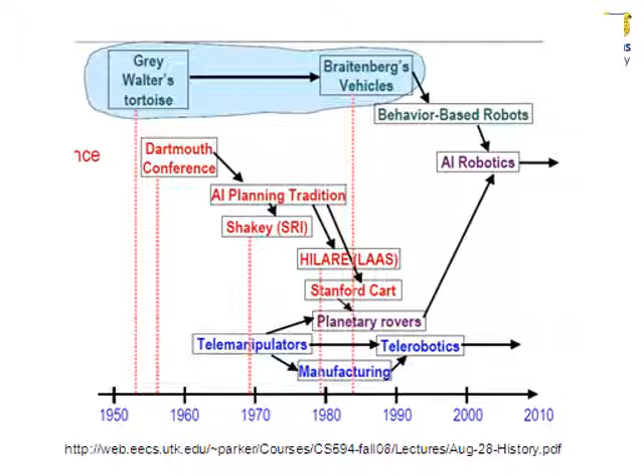But there's two schools of thought here, so I'll talk more about those in detail. Walter Grey was based, I think, at Bristol, and you can still see his tortoise now in the National Science Museum in London, and they've got a copy at Bristol University.

He made a very simple robot. It just had a few valves in it, and on top there was a light sensor that spun around with a drive wheel and a steering wheel, so every time the steering turned, it turned the light sensor as well. He also put a light source on the robot and a bumper, so it could react if it hit something. The back wheels were just passive casters.

There wasn't really a program, no way of programming these things, but it followed a simple circuit: the steering motor turns continuously, and if the light sensor detects a moderate amount of light, it would stop turning.

So if I put this in the room, the steering motor would rotate, moving the robot in a kind of spiral fashion, and it might detect light coming from outside. That would stop the steering motor turning, but the drive motor would keep turning, so it would drift towards the light of the room.

That's moderate light. When it got very close to the window, very bright light would make the steering motor turn twice as fast, so it would approach the light and then quickly move away again - this kind of oscillation approach. That's exactly what would happen.

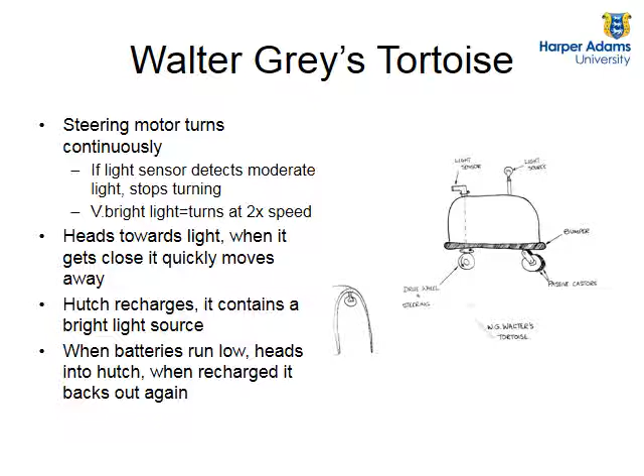So that's a behaviour that just happened almost by chance, that the robot would go into the hutch when the batteries were low, and exit the hutch when the batteries were charged. Wonderful, it wasn't even programmed, and that was something that happened. This is a kind of natural behaviour that just emerged, and it kind of evolved in a way, because that's what the robot needed, and that's what happened.

So it led you to think, well, how does evolution work? It's quite a nice way that things have progressed.

The bumper inhibits the light sensor for a certain amount of time, and it enables full power oscillations to the motors, both the drive motor and the steering motor, to try and move an obstacle. So if it hits something, a table, it would try and bash it out of the way.

He changed things slightly. For example, he changed it so the light bulb, which is on the back of the robot - there's a picture of the real robot by the way - came on when the steering motors were on. And he started to create several of these, about 5 or 6, put these into a room. So their lights on the back of them would be on and off when the robot was turning.

So the other tortoises could learn what was happening, because if the steering motor of another one is on, then their light is on. So it knows that it's either avoiding an obstacle or getting away from a very bright light. And we found that there were certain interactions with these robots. They would follow each other at a certain distance but not get too close. They would flock together. So they had quite interesting behaviours that emerged as a community of robots.

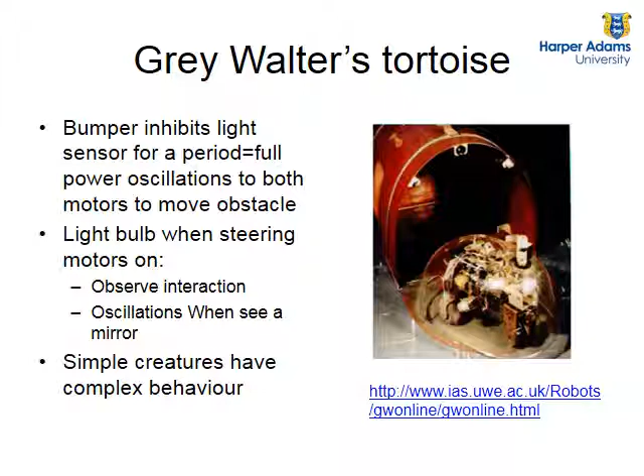So let's look at the other area that was happening. Over in America, there was a Dartmouth conference, and the Dartmouth conference was run by a lot of computer programmers who knew that they could do something really amazing with these new computers that had just been invented, mostly due to the Second World War. What can we do with these things? So they decided that they could make machines intelligent and have robots to do all our dirty work, basically.

So Shakey was developed at Stanford Research Institute, and this took a completely different approach. It was a single robot because it was really expensive. It's full of kit, so it's not small. It doesn't move very quickly, and it shakes when it does move, hence the name Shakey. And it lived in a special room of coloured blocks and wedges.

And the idea was to give the robot certain tasks, for example, climb on top of the blue block. Now in these days they're all black and white pictures, so you can't see the blue block. But the robot had to work out, how am I going to get on top of the blue block? There's a yellow ramp - if I push the yellow ramp to the blue block, I might be able to drive up that ramp and get onto the blue block. So that was the kind of things that they were trying to get Shakey to do.

Most of the processing was done off-board, so that's why it had transmitters on it, because in those days we didn't have the processing power to put onto a robot. It was all done in a computer the size of a room, so it was all radio linked.

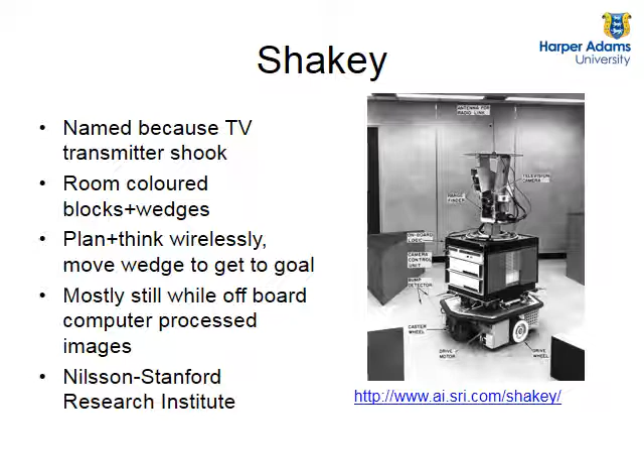So although it was intelligent in some ways, it could do the tasks, it wasn't intelligent in other ways. You could run up to it and kick it over and it wouldn't know. So, completely different from the other approach of the tortoises, where if you went up to those and kicked them, bumpers would react straight away.

So things are moving on a bit now, still using the idea of image processing and trying to combine it with behaviour. The lab at Stanford Research, Stanford AI Lab, wanted to build a robot to land on the moon. So what was built was basically a table with 4 bicycle wheels and a chain. And in 1967, it took someone a PhD thesis to program the robot just to follow a white line.

So in 1970, we've got something which is just following a white line, which is a very simple task for us to do now. By 1980, it moved up to understanding some of the objects around it, and the idea was, let's get this robot to work outside as part of this moon plan.

Now, what happened was, this robot lurched forwards every 15 minutes. It took 15 minutes to process the images. Unfortunately, in 15 minutes, the sun's moved quite a lot to a robot. So if it takes another image 15 minutes later and tries to compare the images, there's a big difference because those shadows have changed so much, and it really threw the robot. It was a real big problem for the robot.

It was using stereo vision, so it was having separate left and right cameras and comparing the differences between the 2 images to determine depth.

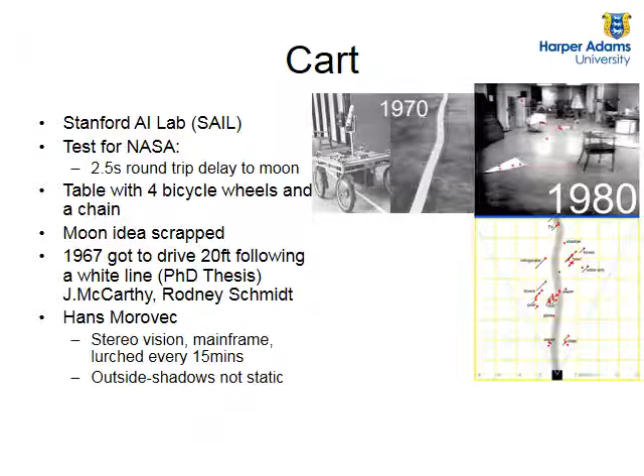Now, the most basic behaviour that you've got to do if you're walking around town is avoid contact with people. Okay, you don't want to go around bumping into people. So that, again, is the most important behaviour for a robot. And then, okay, so you're doing that and that's fine. So what's the next behaviour that can work once this is working?

Okay, so if that's all working fine, avoiding contact, then you can wander, you can find your location, you can find where you want to go. So you're wandering around, exploring the town, and then the next higher behaviour might be, explore if you see something useful, or if you like the look of a certain establishment, go into it. So it's different behaviours happening all of the time.

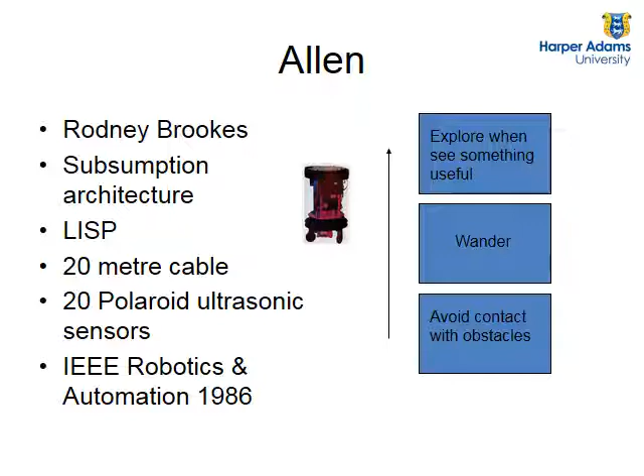So really that's the 2 schools of thought: the complex control, the AI control. The robot will build up an internal world model of the area. So it'll look around at the desks and the tables and think, oh yes, there's something here, there's something there. Build it up inside, maps the environment. And it has a centralised control and planning system. So it senses, it thinks, and then it acts.

We call this horizontal decomposition because it works in a very linear fashion. So you sense, you extract the features, you combine those features into the model. How does what I've sensed relate to my internal knowledge, my internal map of the world? Plan the task, what is it going to do next? What shall I do next? Let's execute the task, control the motors and the actuators. So it's a very linear form.

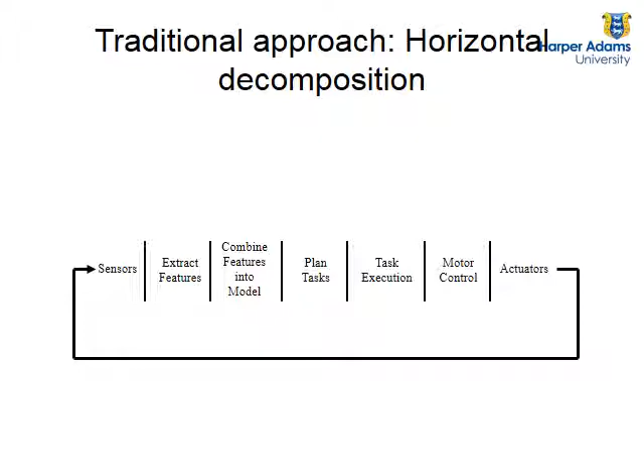The alternative, as mentioned with Braitenberg Vehicles and the Tortoise, is purely behaviour based. There's no mapping or memory, it doesn't remember where it's been, and there's no centralised control. You can have a bumper connected directly to a left motor, or a light sensor connected to the speed of the drive motor. Sensors work directly on actuators, a bit like a knee-jerk reaction, meaning the reaction is very quick and instantaneous. If it hits something, it moves away. This uses biology as a successful model for reacting to the real world - it just senses and acts, it doesn't plan.

There are ways, using subsumption architecture, to cope with conflicting sensor inputs. Going back to Gray Walter's Tortoise, the bumper would subsume the light-following behaviour. We call this vertical decomposition. We have sensors on the left, and there are things going on simultaneously - avoiding collisions, finding the light, following the light. You can tack on more intelligent behaviours which subsume these, running at the same time. So while doing all of this it might build a map as well, but that's not essential - it can be an add-on. Then you've got the actuators, and each of these behaviours can affect the actuators. So we call this a vertical decomposition, or a reactive robot.

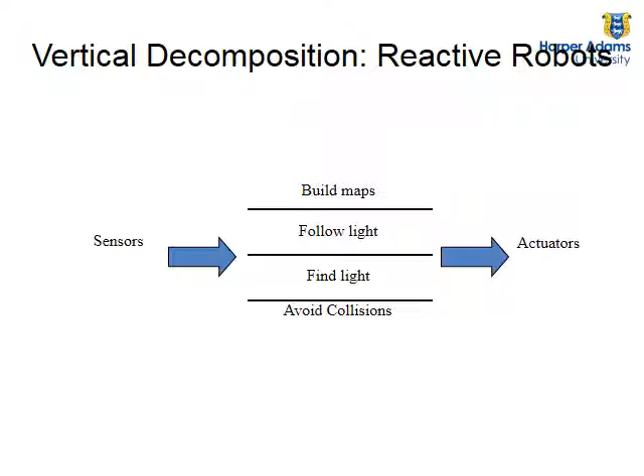So let's have a look at some reactive robots. We have the iRobot Roomba - I've had one of these for years, and it's absolutely fantastic. It's broken at the moment, but it worked for about 5, 6, 7 years, way past its lifetime. Obviously, typical engineer, I've still got it - I'm going to fix it up one day, very soon. I have replaced a lot of the parts on it, but it did an absolutely sterling job. It's only quite small, and has a small bag in it.

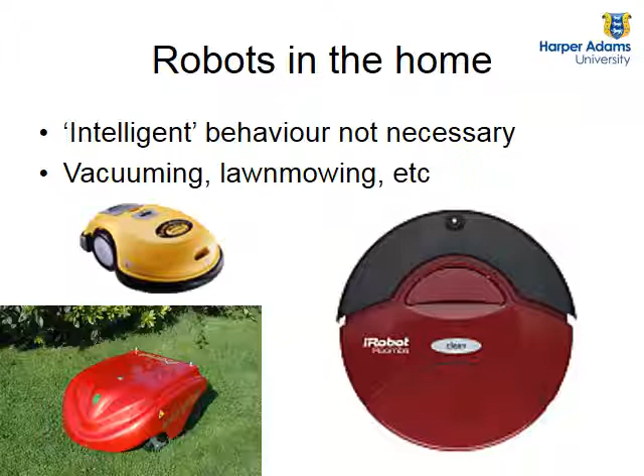You have to manually empty the bag. You put it into a room, press the clean button, and leave it for 40 minutes. It's not intelligent - it moves around quite randomly and takes 4 times longer than a person would, because a person plans where they're going. But at least it's not you doing it, so you just leave it in the room and forget about it. You can put a timer on it so it starts vacuuming at certain times. We've got some examples of robotic lawnmowers too, which work in much the same way, not really planning what they're doing. The difference is lawnmowers can be more dangerous if they run amok and leave the lawn for the street. So with robot lawnmowers you get cables you install yourself around the edge of the lawn, sensed by an inductive sensor in the lawnmower, so it won't go beyond that cable - a necessary safety feature.

Here's a long exposure shot of a Roomba in someone's room. They've taken a Roomba, put a little light bulb on top of it, left a camera, and taken a long exposure shot over about half an hour, so you can see the path the robot's taken. The robot starts here, always beginning in a spiral, moving off in a spiral until it hits something, then moving around a bit like a bouncing ball.

The company iRobot won't release the algorithm - they won't tell anybody why the robot is so good at covering the room. I've watched this robot and it is quite fascinating. People wonder why it starts off with a spiral, and of course iRobot won't say, but some think maybe it's using its sensors during the spiral to get an idea of the size of the room - nobody really knows. It has sensors that slow it down as it approaches a wall, plus bumper sensors, so it slows down before hitting an object and then hits it quite gently.

Sometimes the robot will be going along in a straight line and then just turn at a random angle for no apparent reason. So it's got some sort of timer in there and decides to turn.

What I would say is that when iRobot developed this robot, they most likely created a simulation of the robot and tried different algorithms, saying well, after 15 seconds, if I don't bump into something, turn a random amount or turn 45 degrees. They could try different ideas.

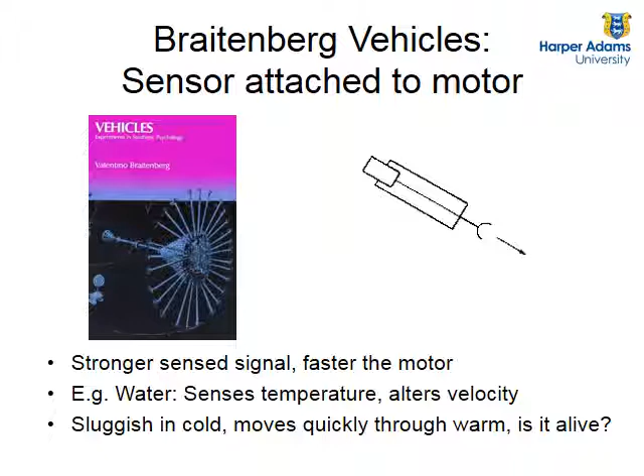You can put two of these vehicles together. So vehicle number 2 is built on 2 of vehicle number 1's. For example, let's have a look at a mobile robot. You've got a sensor connected to a left wheel and a sensor on the right connected to a right wheel. There's 2 pluses here because that just means the sensor will positively affect the motor.

If you have a light source here, and these are light sensors, then vehicle A will move and shy away from the light, because the sensor on the right senses the light more than the sensor on the left, so this wheel will move faster.

But if you cross these round, then your left sensor is affecting your right motor, and you've got something that likes the light. Now, in a robot system, you could have these either crossed or uncrossed depending on its current state.

For example, it might be a solar-powered robot that needs to charge, so it might be in this state. And then, if it's fully charged, it could go into this other state, because it needs to get away from the light, knowing that other predators are around that area as well.

Braitenberg said this was fear - it fears the light, vehicle A - and aggression, because it goes towards the light, and if it's just a bulb, it will go and stamp it out. It will drive over that bulb and keep going until the light's no more, then wander off somewhere else to kick something else in.

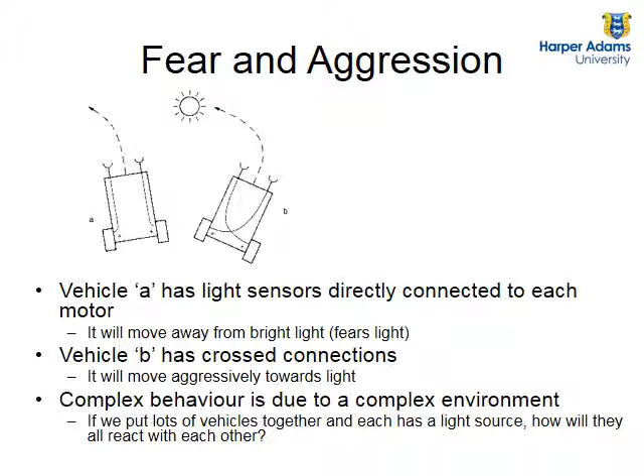So I'm going to talk a little bit about basic algorithms. What's the algorithm to follow a line using a single sensor? We can make a robot almost become lifelike and move along a black line just using a single sensor.

The simplest way of doing that would be to make a vehicle, vehicle 1, connected between the sensor and the right motor, and let's take the left motor out of the equation. I always find with any kind of engineering, keep it as simple as possible. So if we have the left wheel at a medium speed, always running at half speed constantly as soon as you put the battery on, and the right wheel moves at a speed which is proportional to the light that the sensor receives.

If it receives a very bright area, then the right wheel moves faster than the left wheel, and if it's on the black, then the right wheel moves slower than the left wheel. You can probably see how this vehicle will start to follow the line. It doesn't really follow the line, but it follows the edge of the line. So when it's on the white, the right motor will guide it towards the black of the line. And when it's on the black of the line, that slows down, so the left motor is going faster, so it moves away from the line.

So we've got a very simple line-following vehicle, a line-following robot. It almost seems to sniff the line. If you make one of these, it looks quite lifelike, because it looks like a dog on a trail. It goes off the scent, on the scent, off and on. So we've made something fairly intelligent just from that simple algorithm.

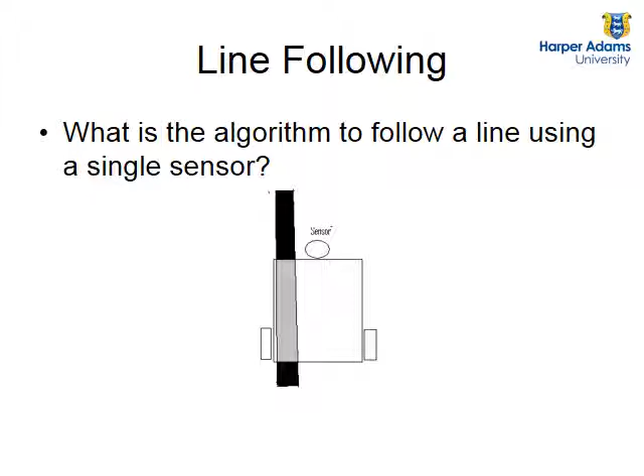We could make it a little bit better. That would be a nice basic line-following algorithm, but let's say we wanted to have an automatic car to drive along the motorway. It also makes you think about how do we drive along the motorway. If it's late at night, there's no other cars, and you can be on the left-hand side, and you're tired, so you just want to keep driving nice and simple. You keep your speed, or you can put the cruise control on, and all you need to do is just keep hold of the wheel, right?

And we're constantly adjusting that steering wheel. We can't tie a bungee cord around it and read the paper. We have to do some constant adjustments. I'm sure some people do, but I don't know.

What we're doing, if we simplify it, is looking at the line on the left-hand side of the hard shoulder, and we're keeping a distance from that line, and we're doing that with our steering. So we're looking at the distance of the line, and we say, well, I don't want to be closer than a metre, but I don't want to be more than 2 metres away from it. So we're proportionally moving, and if that line on the left starts to drift away very quickly, we know that we're drifting too far to the right, so we would maybe turn a bit faster towards the left-hand side.

You can do something very simple and very similar with the robot. Again, we keep the left wheel at a constant speed, and because this motor is proportional to the amount of light that the sensor sees, if it's half on the line and half off the line, and it's tuned nicely, then these two motors should run at the same speed, so it will be on the line quite nicely.

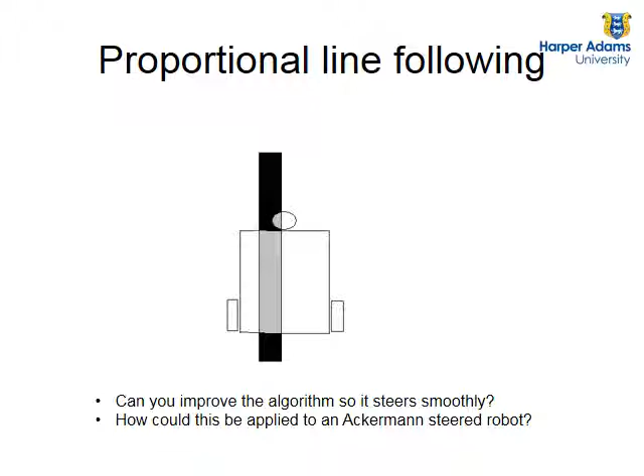I love the title of this paper. Rodney Brooks, with his behaviour-based robotics, created a paper called Fast, Cheap and Out of Control.

Rodney Brooks wanted to land lots of small robots on Mars and leave them all out of control, basically, which is why NASA rejected it. At the time, NASA was spending a lot of money developing a single robot with lots of technology, lots of artificial intelligence, to land on Mars, but it would be predictable.

We would know how it would behave if it saw certain objects and certain sensors. Rodney Brooks, on the other hand, had an idea: let's create many robots, a bit like Gray Walter's tortoises, 100 robots or so. They'd be very cheap, they've only got very simple sensors, they have reaction, but they're all connected with each other. They're fast because they'd be fast to develop, because it's simple, so let's not put too much artificial intelligence in it. Let's just put them all together and have communication.

They're out of control because you can't really say what they're going to do next. If they see an object, they move out of the way of it. That's it. But those robots would be covering a bigger area than a single robot. And if you lost one or two down a crater, or a Martian picked one up and took it home, it doesn't really matter because all of the others are still in communication. So you've got a much wider area of data acquisition than just losing one simple robot. So that's the whole idea behind that.

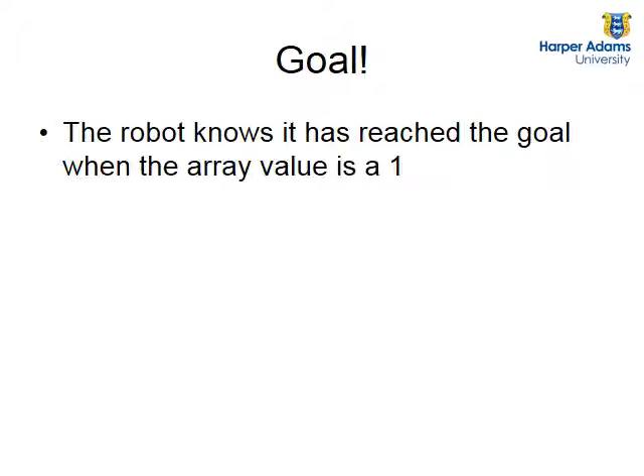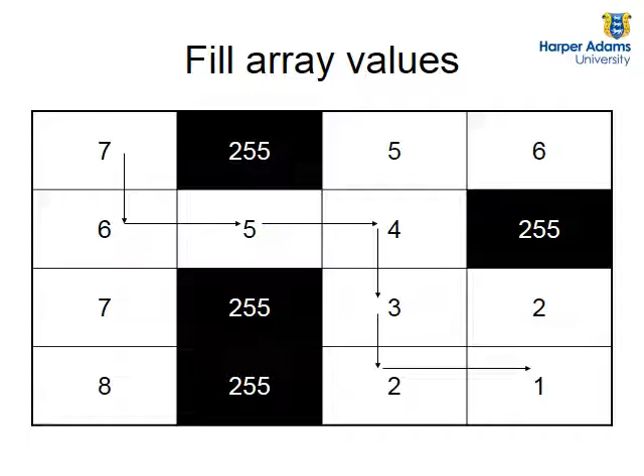This is applied to any kind of road following algorithm. If you want to get your route to London, it's got the values of all the roads coming out of London, and it puts the next value coming out of those roads at every junction. The kind of numbers we're dealing with goes up to thousands, millions probably, because of all the junctions. But there's probably some artificial intelligence that says, well, if it's going off in the wrong direction, don't bother doing that search - okay, I was kind of searching the correct direction. So it will choose the junction of the next lowest number, telling you when to turn left and right.

Of course there's more you can put in there - avoiding toll roads, for example, avoiding lakes, you can build on this, obviously. If you want to look this up, there are 2 routines to it really. One is called the grass fire algorithm, because if you start a fire here, it spreads. There's a more improved algorithm which includes things like toll roads, wheel slippage, or areas you don't really want to go, and that's called the A-star algorithm, the A-star search algorithm.

What's very nice about this algorithm is the robot can start anywhere and always get to its goal position. So if it started here, it tells you the route down. If you started here, it shows you the route there.

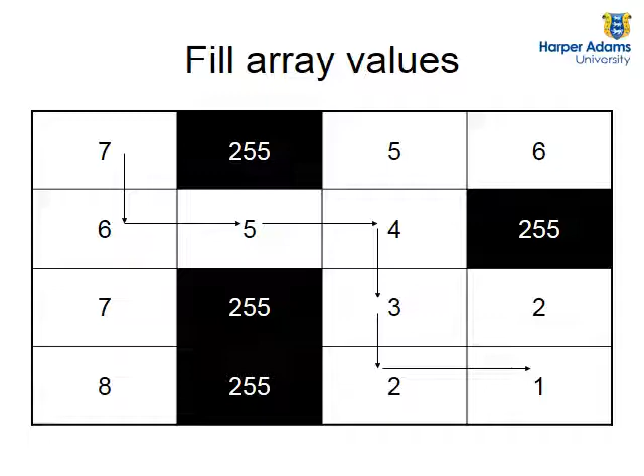What I'll do is I've written a simple program in Excel that solves this, so you can have a play with this on a 10 by 10 grid. I'll send that off to Sven, and you can have a bit of a play. You can try and confuse it by putting obstacles in there. Put your start position, put your goal position, and then see how it gets solved.

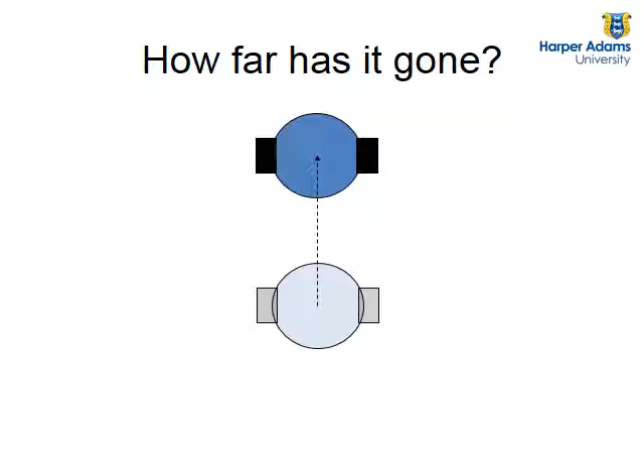So robot kinematics says, well, localization, how far has a robot gone? Let's have a look at a vacuum cleaning robot, it's got wheels on the left and wheels on the right, and it moves. So you drive both of these wheels. How far has it gone? How far is it translated?

If you run the right wheel faster than the left wheel, it's going to rotate as well. So the simple kinematic equation says that you've got distance and angle. So the robot has only got 2 degrees of freedom: its distance and its angle that it's rotated.

And if we just make things nice and easy and say, okay, we know the circumference of these wheels, and we've got encoders on these wheels as well, so we know how far the wheel has rotated. Remember encoders from last time? Basically a disc with lots of holes in it. So you know the distance that the left side has moved, and the distance the right side has moved.

So the simple kinematic equation for the total distance, from the centre of the robot to the centre of the new position of the robot, taken over a sample time, would simply be the average of the two: the left plus the right, divided by 2.

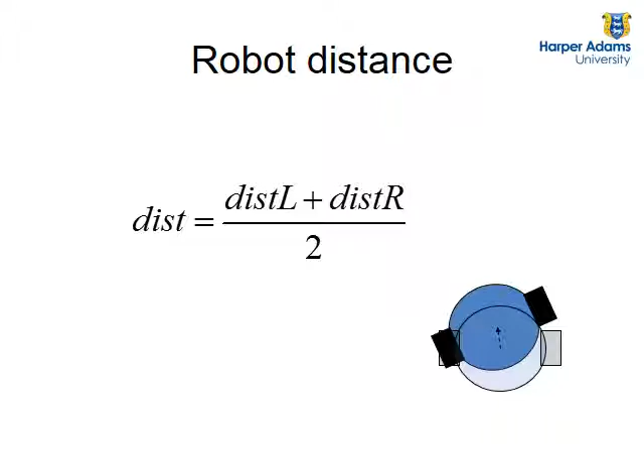So I said it's got 2 degrees of freedom, so it rotates an angle as well. And what is that angle? Well, theta is the right wheel, subtract the left, divided by W. And W is the width, or the distance between the 2 wheels.

So have a think about which direction is a positive angle from that equation, and further think about what units this is in. Anyone hazard a guess? Radians, yeah. And positive? Anti-clockwise, yes, positive would be anti-clockwise because the right is on that side, on the right-hand side. So theta is in radians, and a positive angle means moving to the left-hand side, anti-clockwise.

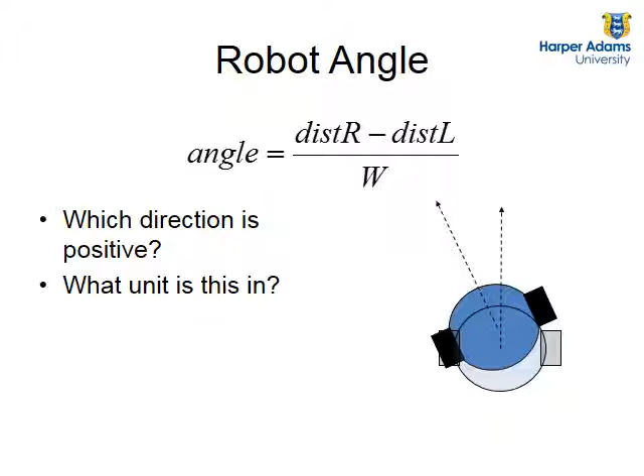So you can add those values together, and every sample time you can read the encoders and know where your robot would be. You can simulate your robot, which is what I've done. I'll try and show you some examples a bit later on of a simulated robot. You write the program and you see how it can behave, where it would be. You're simulating where objects can be and how it behaves to that.

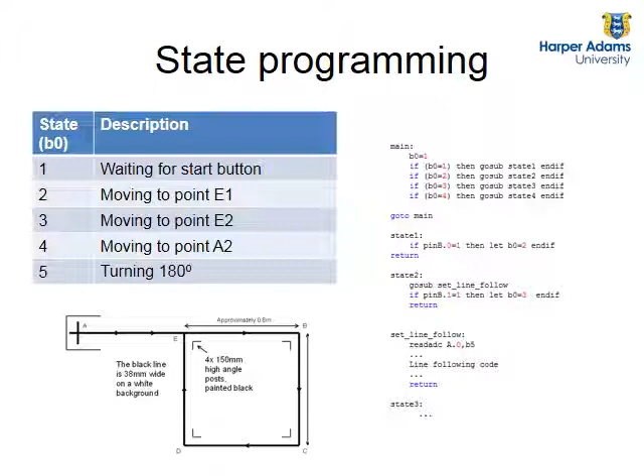Your state on a Friday might be go to the first pub. After several pints, your state might be find a kebab house. Your state might be find a nightclub or find the way home. We move through different states in robotics, and they have different importances depending on our current senses - hunger state, or beer requesting sensors. I'm sure there's beer requesting sensors somewhere.

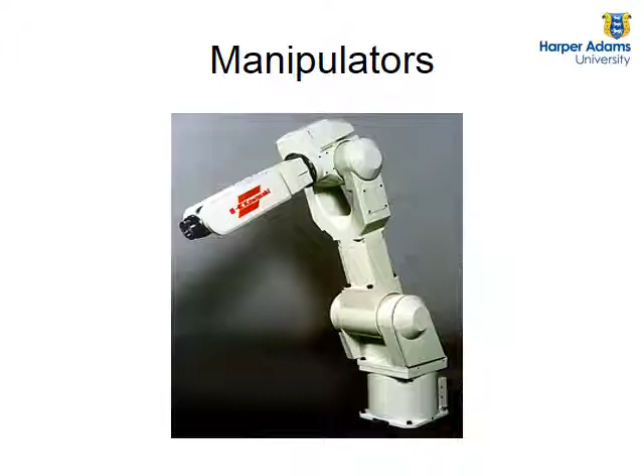Okay, so I've talked about mobile robots, which really applies to agriculture, but I'll just talk a little bit about industrial robot arms. I cut my teeth on robotics with robot arms, so I'm quite happy using these things. Interestingly, a lot of robot arms are made by motorbike manufacturers in Japan, so you have robots like Kawasaki, quite popular. Toshiba make robots, Epson make very fast robots as well, ABB, Kuka, Fanuc. So some German, a lot of Japanese.

So here's some examples of how robot arms move. I've just taken this from How Stuff Works - if you do a search for robotics on this website, it shows that robots are basically divided into a robot base, which rotates, the shoulder, exactly the same as our shoulder, elbow and forearm, and then the end effector. The end effector could be a gripper, it could be a hook, it could be a sucker - it doesn't have to be fingers. The forearm usually does this dexterous bit, so it's usually got the pitch, the roll, and the yaw, and then you've got your end effector. So you've got your different motions.

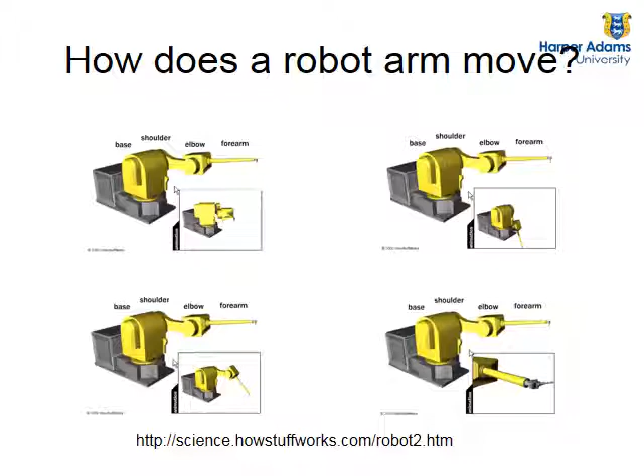Usually there are 6 motors in industrial robot arms, we call it 6 degrees of freedom. So the ones missing from this are the pitch, the roll, and the yaw - some have, so that's 5, 6. Yeah, the forearm actually represents roll, pitch, yaw. So 6 degrees of freedom is quite average.

These are actually quite interesting tasks, because if you think about drilling, robots originally were position robots, so you would send it to a position and it would stay there. I've gone to that position, I've moved something there, fantastic. But with items like drilling, it's not a position problem. Yes, it moves the drill to a position, but then it becomes a force control problem, because you're drilling a hole. You move the drill to the right position, but then you apply a force and let the drill take control, really, and you can feel, are you pushing too hard, are you pushing too soft, and your position becomes secondary. It's the force which is the most important. So robots now can apply forces and go into force control mode whilst monitoring the position.

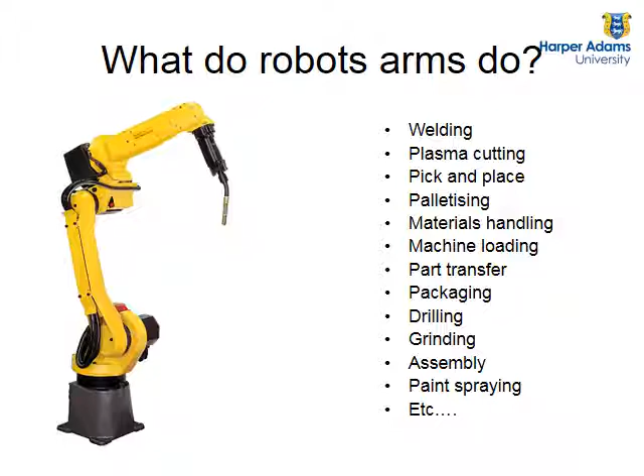Robotics are starting to work amongst humans, because these kind of robots have to be separated from people. They have no sensors, and they will just keep moving and take someone's head off if you get in the way. But with a lot of manufacturing, they want robots to work around people and amongst people, because they take up a lot of space if you have to separate them. But if you've got force control on, you can have them working around people, and if you lower the power of the motors, so if a person does bump into it, it's not going to hurt too much. It's got sensors on anyway. So force control is the big area of robots nowadays.

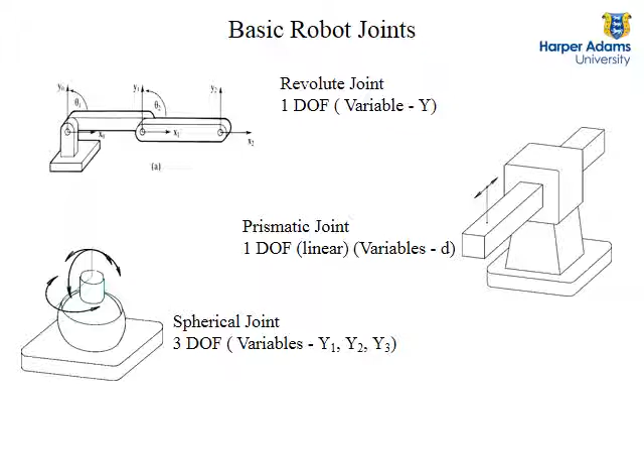You can get spherical joints on robots as well for the wrist end effector, so it can move in 3 degrees of freedom. 3 degrees of freedom would be up, down, to the right, and then a rotation, so actually 3 degrees of freedom, and basically consist of those.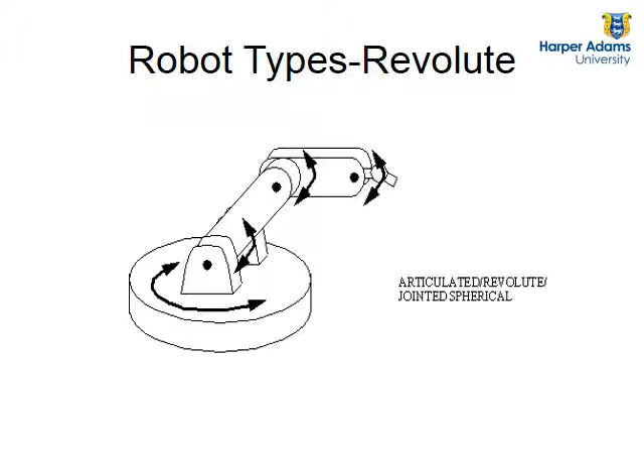So have a look at your basic revolute type of robot. This is the same as the Kawasaki robot that I showed at the start. This is generally what people think of when they think of a robot. So, 6 revolute joints.

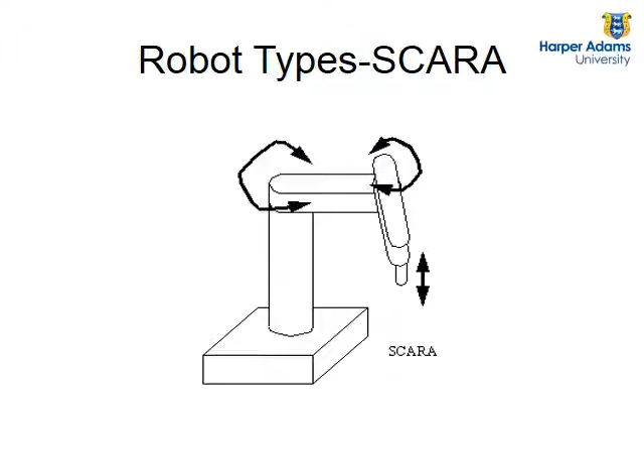You also have a SCARA type of robot. I might have a picture - ah, there we go, that's a bit better. So a SCARA robot was made because of this peg in the hole problem. The joints of the robot basically move in a horizontal fashion. What's very clever about this robot is if it's putting a peg into a hole, if you release the power of the elbow and the shoulder motors, it's still going to keep that position, but as the shaft moves to put the peg into the hole, the peg will allow these joints to comply, the elbow and the shoulder joints to comply. So this is why this is used in assembly.

SCARA stands for Selectively Compliant Arm for Robotic Assembly. It's selectively compliant because if it's putting a peg into a hole, it can turn these motors off, so it becomes compliant, selectively compliant.

When you say a peg and hole, does that mean a bolt? It could be a bolt, or it could be an axle that's going into an axle housing. I remember building an old VW engine once, and there were certain shafts I had to put into it - I can't remember which part now, but it took me ages because the tolerances were so tight, rattling it I couldn't even do it. I had to try it again and again. So it's any kind of assembly task, really. Yeah, it could be a bolt - you tend to turn it and it tends to comply its way in as well.

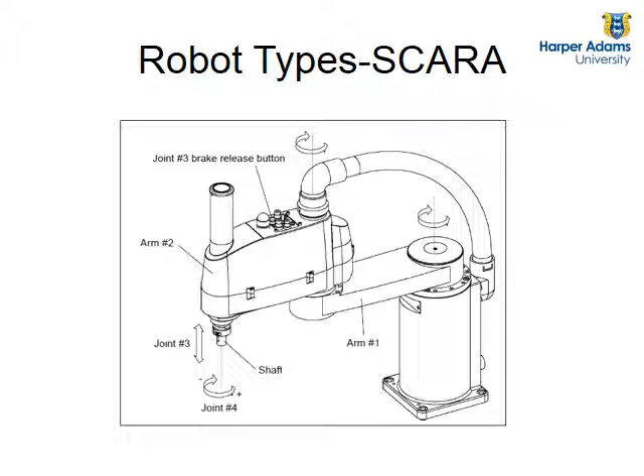Then you get the Cartesian or gantry type robots, or plotter if you like. The good thing about these is they're very good at moving in straight lines. Funny enough, the SCARA and the Revolute robots can't move in straight lines because there's nothing straight in the joints. So if you ask a robot to go from one position to another and plotted the line it's taken, it would not be a straight line. Only a gantry or Cartesian robot will move in a straight line, because each joint of a Revolute robot will just move as fast as it can to get to a point, and they tend to jump.

There are ways of making it follow a straight line, but you have to put lots of intermediate points. In point-to-point motion, my Revolute robot going from one position to another will probably follow a loop, which is no good if you're working on a table and need to move something from one place to another in a straight line, because it might lift it up, or try and push it through the table. So the only way to do it is to calculate the straight line you want, going from point A to point B along that line, by having lots of points along the way. So really, there's lots of little leaps, but they're so small it looks like a straight line.

This is called continuous path motion, going in a straight line, and this is called point-to-point motion if it just goes from point A to point B. Point-to-point motion is a lot faster, continuous path is a lot slower but more accurate. So when you program industrial robot arms and say, move to the coffee cup, you can either say point-to-point or continuous path to that coffee cup. But if the path isn't important, you say point-to-point because it will get there very, very quickly.

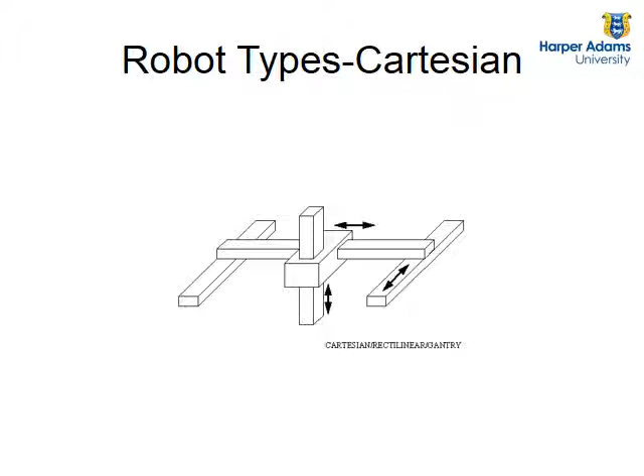Possibly a slightly odd question. So if you've got something like a laser profile cutter, this would be a Cartesian robot. But if you're cutting holes and cutting shapes, you want a very high resolution to do that.

Would that take more processing than a robot arm? If you're trying to cut cost-wise, would there be a cost comparison between that, if it's doing a material handling role and then doing something else?

If you were just cutting shapes, it would be best to use a Cartesian robot because it's easier to program. Each joint isn't responsible for the next joint, so you've got accuracy in the X and accuracy in the Y. They're very cheap, around about 10 grand. You buy the individual X and Y components separately, so you can make it as large or as small as you like. But if it had to handle something, Cartesian robots can't do that.

So they're great at working in shipping container areas, but if it had to then handle something, you'd have to either have two robots, or you could do it with a Revolute robot, but it would be a not very accurate way of doing it. Their accuracy isn't as good as a Cartesian.

So just talking a bit about accuracy, you can see why a Revolute robot is not very accurate really, because the accuracy of the endpoint relies on the accuracy of not only the base rotation but also the shoulder. And the longer these joints are, the elbow and the shoulder, the more that can move, so accuracy is a big problem.

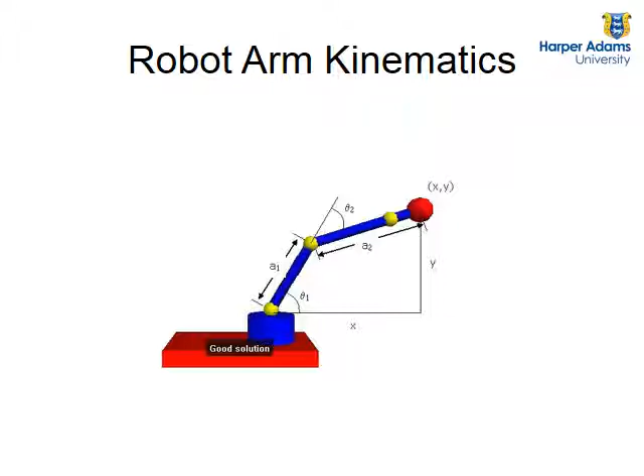So just talking about robot kinematics, again as I spoke about mobile robot kinematics, where am I from knowing those sensors? We've got encoders in the base, shoulder, elbow, wrist. Knowing those angles, you can calculate the endpoint. But you can see that you're talking 3 dimensions, and it can get fairly complicated as well. It's all robot modelling and testing.

We have a larger robot, which is an orchard tractor robot, which gets taken out to Switzerland. It's going again this year to autonomously work through orchards using its LiDAR scanner and using GPS, and take readings of the environment, of the canopy, using laser rangers to see how much the canopy cover is.

We also build some of our own UAVs. We've got lots of UAVs here. We're looking at making these smaller and smaller using rapid prototyping materials that we use.

We're not the only ones to make robotic tractors. There is a FutureFarm objective, which is a European research platform, and it's all about precision farming, autonomously controlled tractors, and some nice different ones here. Quite like this one, which has got independently controlled steering wheels, so it can move crab-like if it needs to.

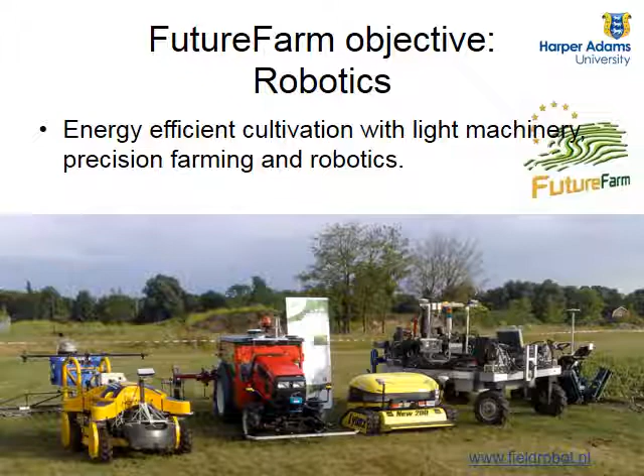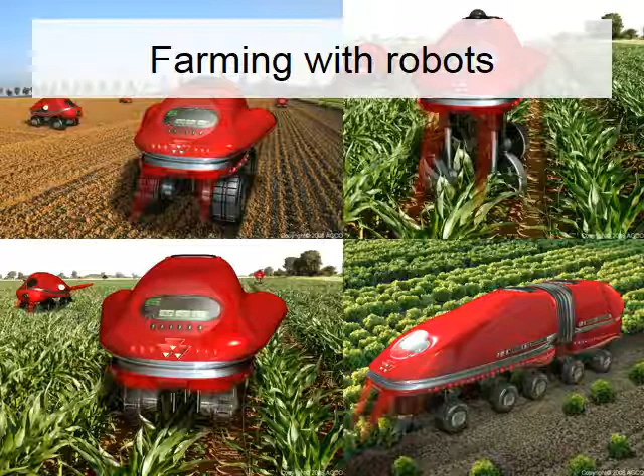So you might see some of these pictures. These were just created by Massey Ferguson for us, which just show the concept. Our robots aren't really going to look like this, but it just shows you future concepts of things.

So really we're turning farming on its head by using robotics, because the robots have got GPS receivers and sensors, so we can focus on the plant needs. And we're developing a farm information system.

We still want to have large manned tractors for large harvesting logistics, but what we're really looking at is having smaller tractors, small vehicles, and I'm talking pretty small, that won't compact the ground. They're all in communication with each other, and they're behaviour-based and planning-based as well. And we're looking at 4 stages: crop establishment, crop scouting, care, and selective harvesting.

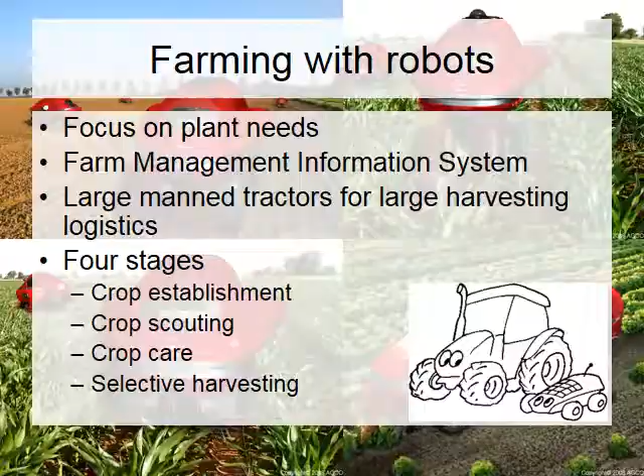So these are some of the requirements that we have just from a bit of a brainstorm. What do we need with our robots? The main one is lightweight. We want it lightweight because we want it to be able to work in soft soil. We want the robots to be able to work when it's been raining and not compact the soil too much.

Small and autonomous, computational and energetic autonomy, so be able to charge itself up, be able to plan its paths. Weather independent, so it can work when it's raining.

Redundant system architecture is something you find with robotics. It means if something breaks, the robot can plod on. So the robot on Mars that lost one of its motors to the wheel jammed, it can use the other motors to compensate for that. So it's a redundant architecture, which leads on to graceful degradation. If a few sensors stop working, can the other sensors compensate for that?

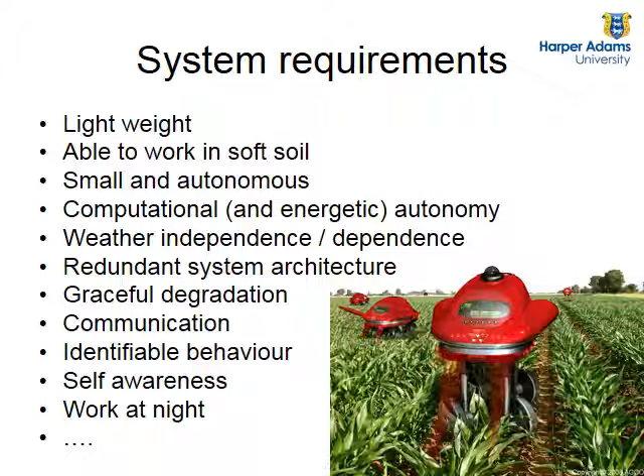So we don't want the robot to stop and have to have someone fix it every time one little thing goes wrong with it. Communication, we want to be able to understand what it's doing. Self-awareness, so it knows if it should stop, if there's objects in the way, and be able to work at night, for example. For example, a robot could just wait. So if it's spraying, if the wind goes up, can it wait until the wind dies down and then continue?

So what we've developed is a route planning software, and this is an image of Harper Adams. Actually, the engineering building's here now. This is taken from Google Earth. Now this is our software, so it integrates with Google Earth, and what you can do is plan the outline of the field. It creates the GPS coordinates from that plan, and then you say what width of implement does the robot need to use, or the vehicle, and the software will plan the most optimal route to cover that field.

Whilst minimising the amount of headland turns. So sometimes the results are not what you would imagine. Sometimes it goes diagonal, it just depends on the outlay of the field. It doesn't care about the longest part of the field or north, south, east, west. It's got an algorithm that looks at the most efficient coverage. So let's just play this again. So we have a real simulator for vehicles.

Which saves us having to go out into the field every time, and if something goes wrong. So you can see the robot coming in here. All of these points are the waypoints. So the route planning software creates waypoints that the vehicle should aim for. So it aims for the next waypoint, turns around, does a bit of overshoot because it can't follow it as accurately as it needs to sometimes.

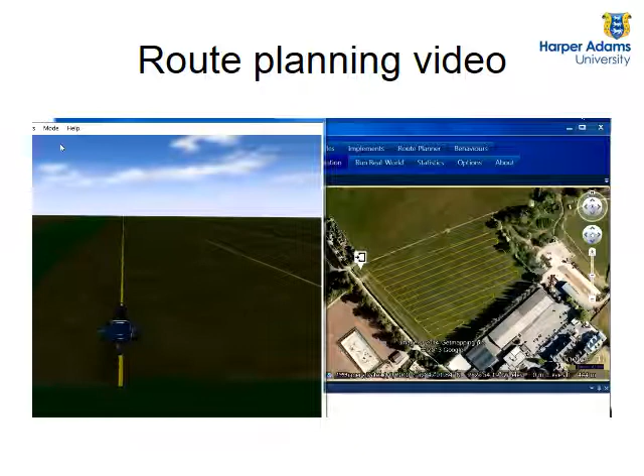You can also see the coverage. Sometimes you'll see a lighter green coming out, and that's the coverage that the robot is making. It's coming to a headland turn now. See the coverage, just updates it every now and then. This is what the farm manager would see, the position of the robot. It's moving around the headland. This would be the real robot, or the simulator that we're using. It doesn't matter whether we're simulating it or it's a real thing, it should be all the same.

And with our software we can also look at different viewpoints. So this is the simulated one. Let's get a bird's eye view and see how is it covering, and is there any overlap. It stops doing its work as it turns at the headland and then resumes again. You can see that there's minimal overlap at these points, and there's only a small amount that it's missed.

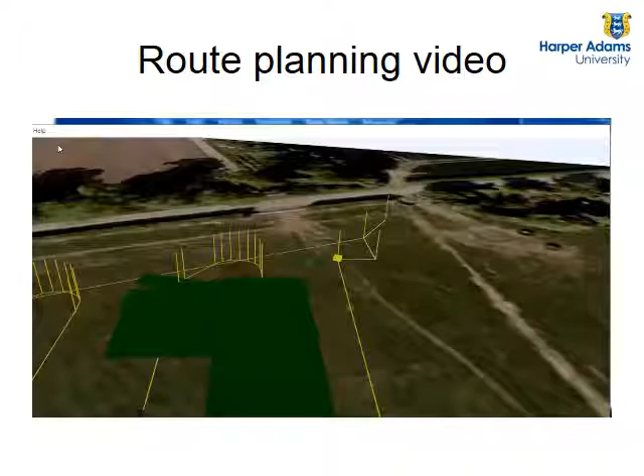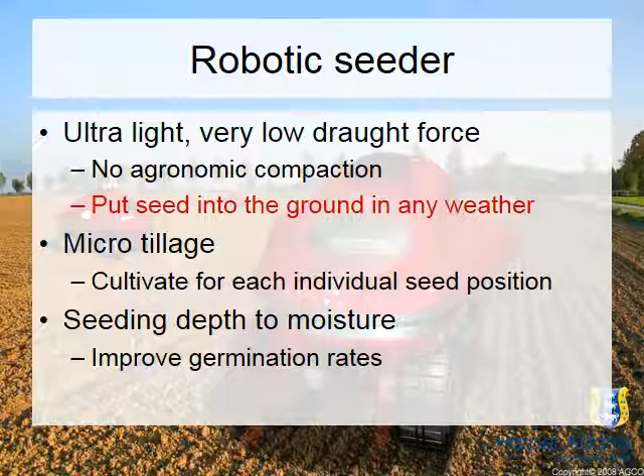So the robotic seeder that we've developed is very light, with low draft force and no agronomic compaction, so it can put the seed in the ground in any weather, whether it's rain or shine. It can cultivate for each individual seed position, storing the location of each seed, and can even change the seeding depth depending on the moisture and germination rates.

So this is the robot in action, built by our master's students. This was taken a year ago just outside. Now this field was at field capacity, which means it was almost waterlogged. You put in a litre of water, you'd get a litre out, so you can't take any more. It's not autonomous at the moment, this is being radio controlled just to show the dexterity of the robot, front and rear wheel steered by these students here.

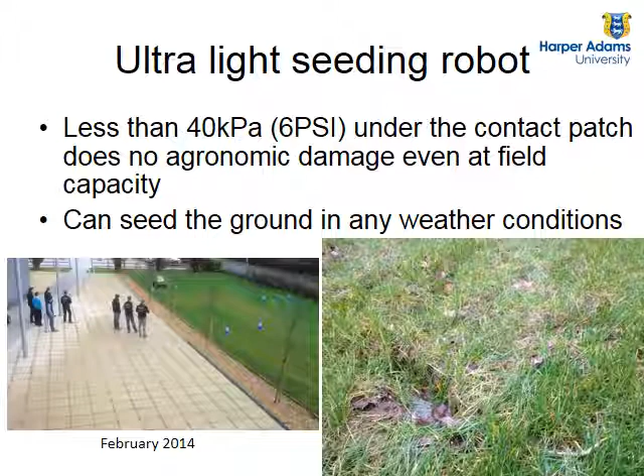Now by walking onto that field, here you've got a flooded footprint, but next to it you've got the tyre track, which shows that the pressure of that vehicle is not as great as a human's footprint.

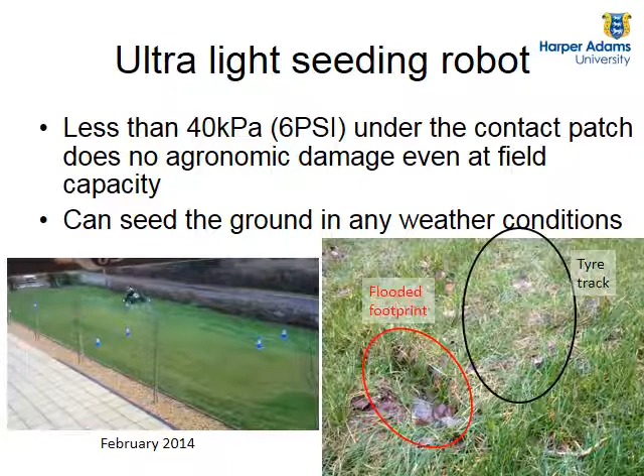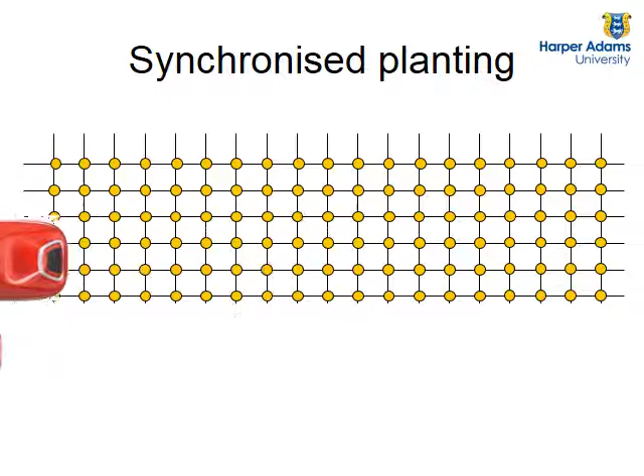So if we look at weeding, I'm quite interested in organic weeding, which can be made simpler by synchronized planting. We can have many robots with very precise timed location of putting the seeds into the ground, which makes weeding simpler because you can weed in between. For example, you can weed in that direction, taking out anything that's red, and weed in the vertical direction.

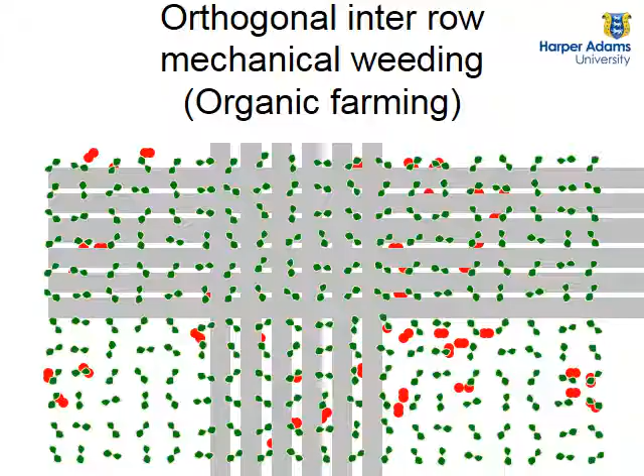We're also looking at laser weeding, so can we use a camera to recognise rows of crops, and can we also use a camera to recognise weeds and the growing point of the weeds, the meristem of the weed? If we can recognise that growing point, can we do something about it using the least amount of energy? If we recognise a weed, we could use a small amount of pesticide or herbicide. Rather than spraying the whole area, can we just recognise the weed locations and spray just those bits that we need to?

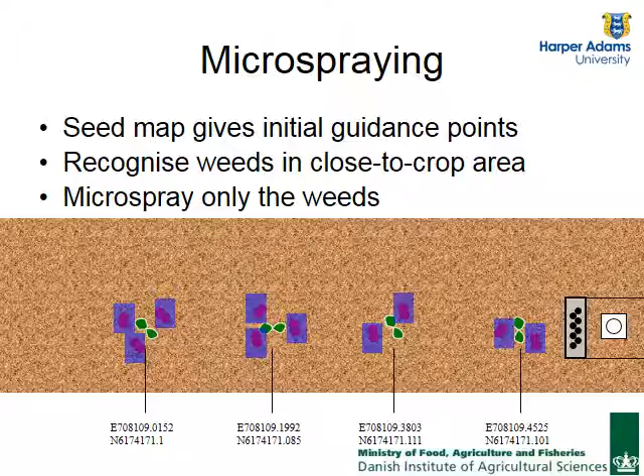So can we go completely organic and use lasers just to focus on the plant? Now what we're doing is, with our lasers, we're not trying to blast the plant out of the soil - that would be fun, but it would take a lot of power. What we're doing is just trying to heat up the cell walls of the meristem to rupture it, just that growing point, just a few of the cells, using as little power as possible and as quickly as possible to just disrupt those weeds. So they won't die straight away, but they will die after about a week. They won't continue to grow.

So the idea of using the sort of flame - yeah, exactly, to rupture the cell walls. And in fact, we could use it - if we can recognise the weeds, we can use a flamethrower.

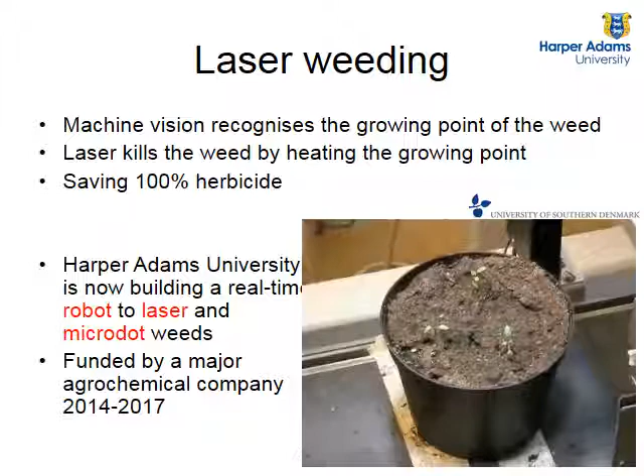We have a robot called Dionysus, which is now in Greece, developed by master's students a few years ago. This had several sensors on it: a multispectral camera for nutrient status, LiDAR - a laser ranger - for canopy extent, to see how much the canopy is growing. This is for vineyards, and this is a modified quad bike, you'll probably notice.

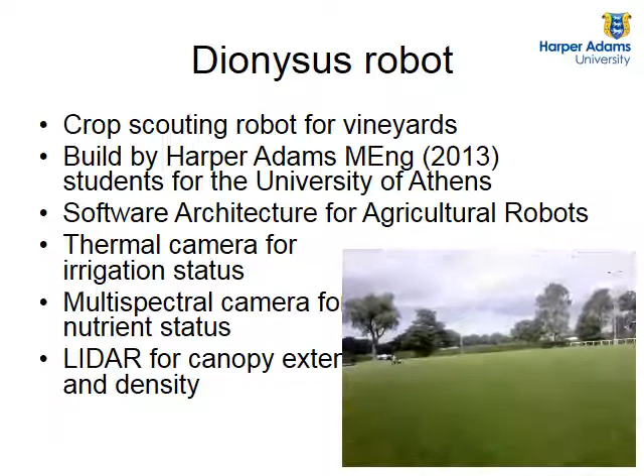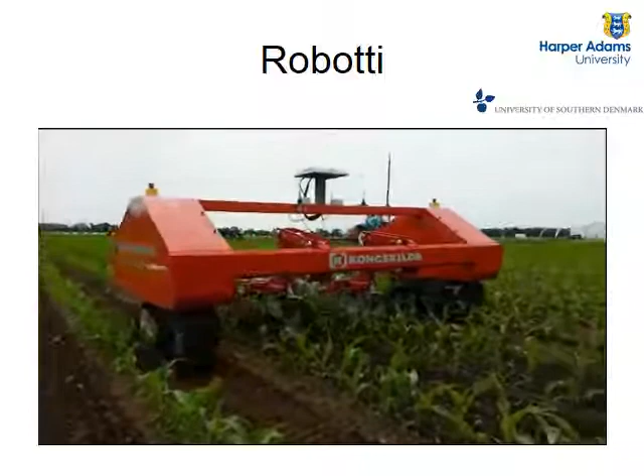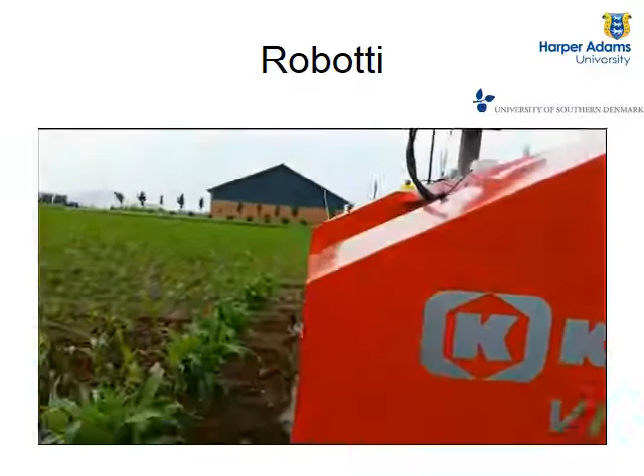Robotti is a robot which has been developed in Denmark specifically for cropping. So rather than taking an existing robot, they've completely rebuilt this robot. It's quite efficient, it's got tank tracks on it that move autonomously. It's like a mini gantry.

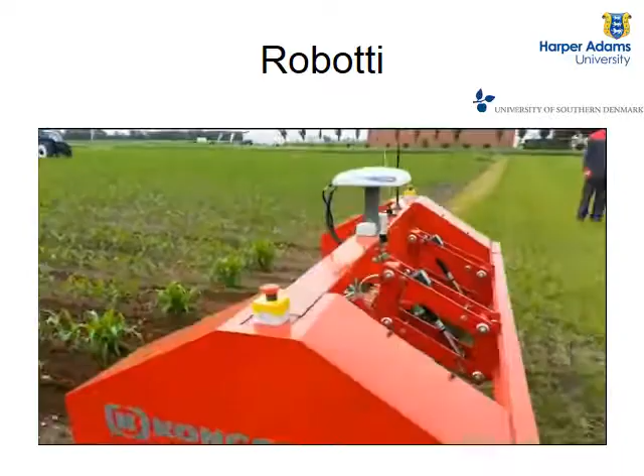We have our UAV research as well, where you can have a rapid assessment of crops. One idea that's been done is to use UAVs to plant seeds, certainly in rice paddies, where they can just fly over a flooded rice field and open up a bucket with the rice seeds in and let the wind blow the seeds around. And we can kit these out with, we have 6-rotor UAVs, so they've got quite a high payload, so they can carry all sorts of sensors: NDVI, thermal, multispectral cameras.

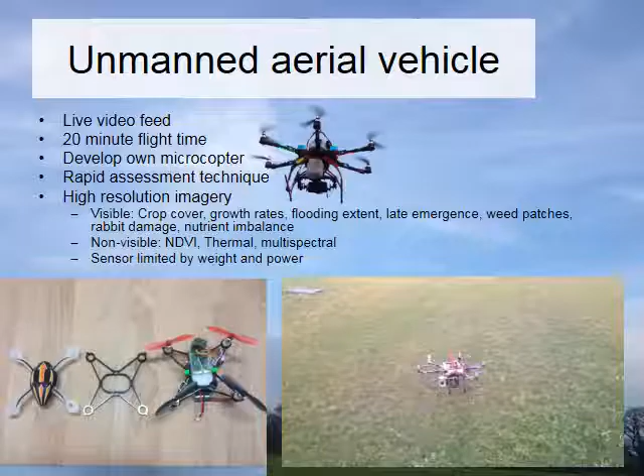And talking about selective harvesting, so why harvest everything in a field? Up to 60% of harvested crop is not saleable. So only harvest that part of the crop which has grown and is ready to harvest. You could look at the quality and separate them as you're harvesting, so you can grade them for packing and sort them, grade for quality. So you're minimising the off-farm grading and sorting.

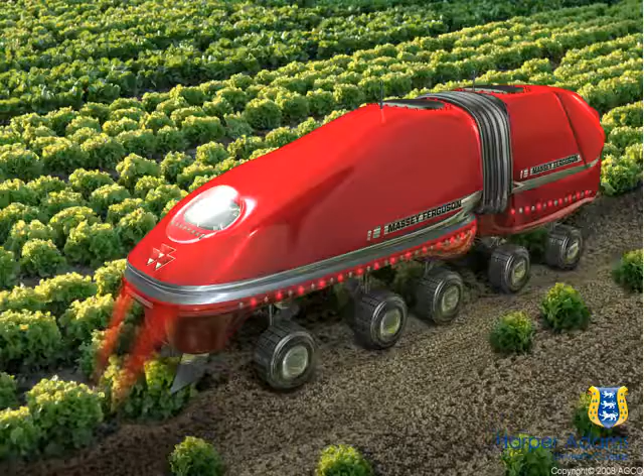So the concept here is that we have this robot system with sensors that look at harvest quality. You can see that it's left some behind and it knows the location of each - the focus is on the individual plant. The GPS coordinates of all of these plants has been stored, and the robot can come back to those in a week or two. It can grade them, it can sort them, and in the back we can have storage and it can separate the storage. So the back part is a trailer.